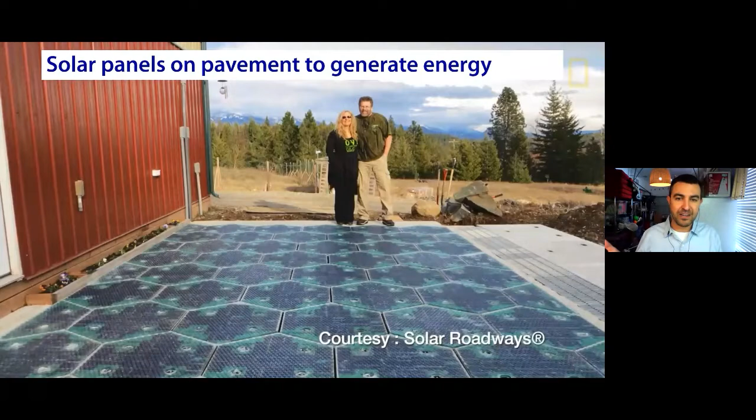Solar Roadways is a company in Idaho, a husband-wife company that's done lots of different ways of building solar panels you could drive on. Caltrans looked into it, but decided against it. Another major company called SolaRoad, out of the Netherlands - this is one of their test sections that they've built.

So the people who like the idea of solar panels on pavement say that we're generating free energy, and they estimate it takes about 220 square feet of solar panel to power one house - so that could generate a lot of free energy. The critics say the cost doesn't work out, the return on investment doesn't work.

And when you drive 18-wheelers on these panels, they don't last very long. There's also issues of texture and friction. So what's becoming more realistic is maybe solar panels in parking areas or shoulders, but probably not main lanes. So that's one idea.

The Ray, this test section in Georgia, is run by a big nonprofit, and they've got about 12 different projects that they're running right now. So it's not just solar panels on pavement.

The Ray is also testing out fancy road striping that can talk to driverless vehicles. They're looking into things that are more for climate, and then they have these fancy weigh and motion devices that actually check the tires as you drive across the device for the texture to make sure that your tread is thick enough, and it can also measure tire pressure. So there's just a lot of new technologies that the Ray as an organization is working on.

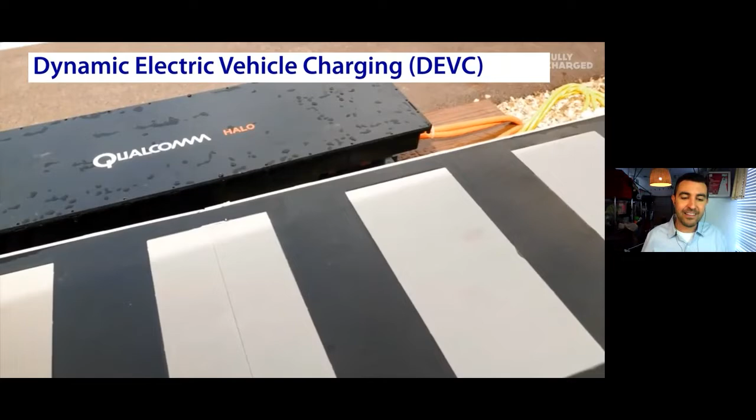All right, here's another big one. This is called dynamic electric vehicle charging, but this is recharging your Tesla as it drives down the highway. This equipment is built by Qualcomm. You're looking at a test section in France. It's embedded in the roadway, and then you drive over it, and through induction, it recharges the batteries in your car.

There are test sections in Israel and Sweden, and actually the Illinois Tollway Authority looked into doing this as a whole new way of collecting toll revenue, but they couldn't get the return on investment, the math, to work out. And so people who like this idea say, just imagine if you could just drive your Tesla over DEVC, then it goes forever.

Imagine these driverless electric cars that never even need to be recharged. But skeptics say that this is not such a smart idea because you're installing this in the pavement, so it's expensive to install, expensive to maintain. How are you going to maintain the pavement around it? And batteries on Teslas and other electric vehicles, the range is getting better and better, so it may not be all that necessary.

Now, the most realistic idea of this is maybe like a downtown circulator bus, kind of like a small shuttle bus that's downtown. As it circulates around, if it could recharge, that could possibly have a positive ROI.

Now, as far as electrification of roads goes, this is the organization that is leading the way in the United States and most of the world. It's at Utah State University, and it's called Aspire. They just got a $50 million grant from the Department of Energy to really start electrifying roads, and they are leading the nation at developing these ideas and looking into real applications for state DOTs.

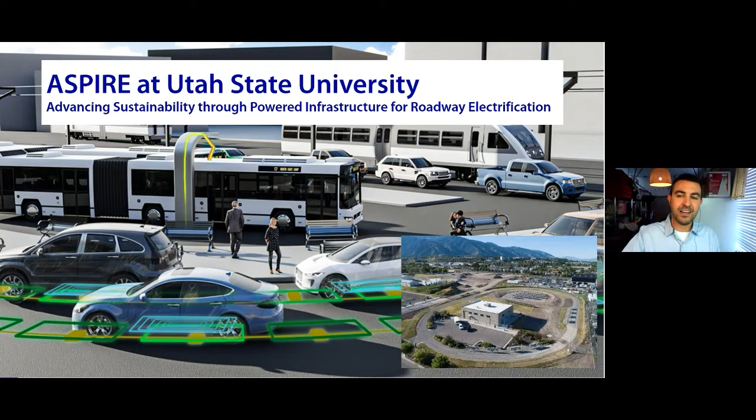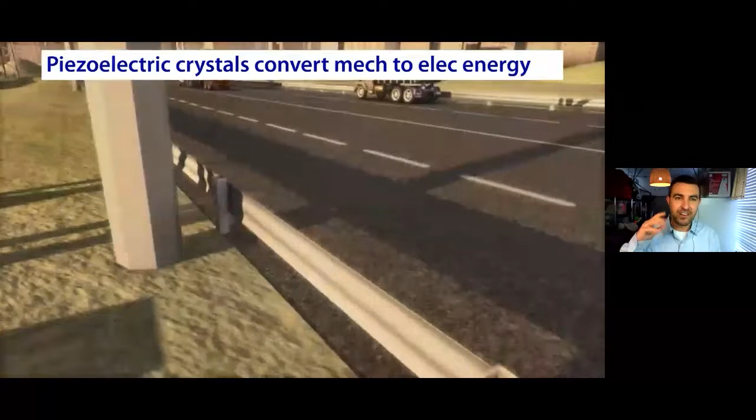Here's another way of doing free energy. This is a video from a company called Innowattech out of Israel. About 10 years ago, they built a test section where you put these little blocks, or piezoelectric crystals. When you squeeze them, it makes a voltage that turns into electricity. So if you drive over thousands of these, and the cars are squeezing them in the pavement, then you can create enough electricity to either store on the roadside, push it back into the grid, or use it to light the highway at night. These are real test sections that they've built, and they're actually working properly.

In the city of Merced, California, they built a test section to try this out. And in San Antonio, Texas, working with the Texas Department of Transportation and the University of Texas San Antonio, they're building test sections to evaluate this right now as well.

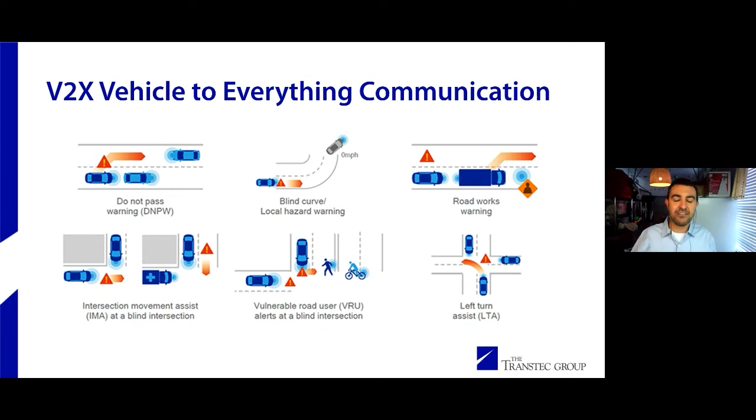This can provide new safety benefits that are already starting to be implemented and tested out. Imagine if cars are talking to each other - you could have do not pass warnings, alerts if there's a blind curve with a car stuck on the other side, alerts about work zones up ahead, help with intersection movements, alerts about a person or bicycle in a crosswalk up ahead, or left turns. There's a lot of information and safety features we could do with V2X.

V2X can improve traffic flow and safety and change the way we do lane markings and joint patterns. Roadside units are little boxes you stick into the side of the road that are a major component of V2X, referred to as DSRC, dedicated short range communication. It helps cars talk to each other and to the cloud.

New cars are already doing this - sending data to cell towers, and that goes to the manufacturers right now. But that data could soon, instead of going to manufacturers, start going to other databases. That data is called basic safety messaging, and it's generally about 138 kinds of information that go from the car to the cloud 10 times a second.

Right now, if you've got a 2018 or newer vehicle, the car manufacturer is capturing all this information from your car passively without your knowing it - everything from is your turn signal on, are you depressing your brake, what is the accelerometer saying about going uphill or downhill or sliding. It's just a lot of information.

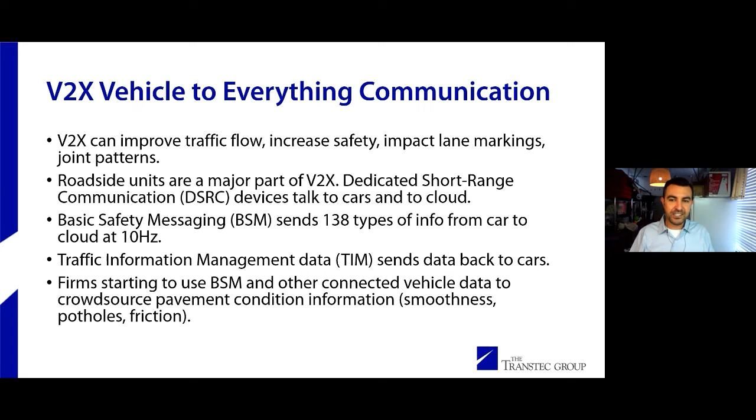We're able to send information back to the car through what's called traffic information management data. Companies are starting to use this BSM data with connected vehicles, and we're starting to develop crowdsourced pavement conditions, which can affect the way we measure smoothness, potholes, or friction.

V2X is a huge field. You could also imagine using it for driverless truck platooning. Adaptive cruise control is available on new cars, and cooperative adaptive cruise control is where the cars talk to each other - that's coming, and V2X is going to enable that.

Imagine if cars were talking to each other and to the cloud - you wouldn't need toll gantries anymore on toll roads. That's what people call a digital wallet, and that could ultimately change the way we pay for roads. If you think this is crazy, there are well over 40 million cars on the road today in the US already sending data to the cloud, and they estimate that within 10 years, the majority of cars on the road will have this capability.

All right, other things that are going on - in Finland, a company called Vaisala has already built a real-time pavement management system that doesn't use any of those fancy million-dollar vans that you hear companies using for automated distress data collection that state DOTs use.

This company, Vaisala, cut a deal with the postal service of the nation of Finland, basically the USPS of Finland, and they've strapped cameras and sensors onto every delivery truck. So instead of having these million-dollar vans, they've got a $50 pack of sensors and cameras on every truck that's collecting all this data in real time. Vaisala claims that all this constantly feeds into what they claim to be an artificial intelligent system that's doing real live pavement management in real time, which is pretty amazing.

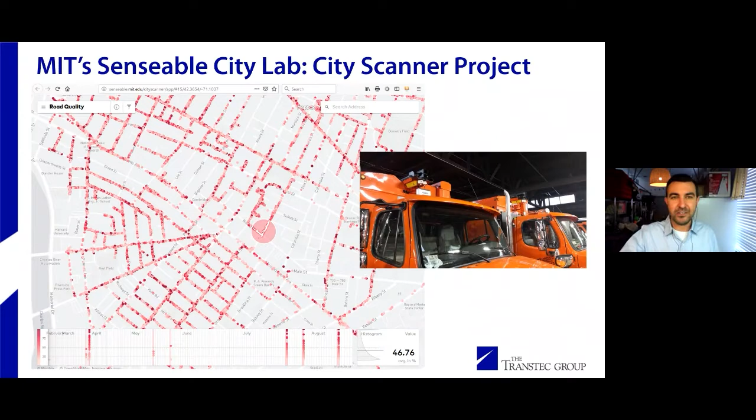Here's a company called iCone that is selling work zone products like cones and barriers and stop signs, and they're all connected to the cloud. The purpose of this is that by having work zones connected to the cloud, you can have devices that could actually send data to connected cars. So imagine your backup camera screen or your infotainment screen in the middle of your dashboard console could light up and alert you that there's a work zone coming. Also, the same devices could alert workers.

So you could put a cone, or that construction zone pin, far out at the leading edge of the work zone. And if a car crosses into that, it could sound an alarm or siren that alerts everybody in the work zone that a car has breached it. So it could really improve safety for work zones.

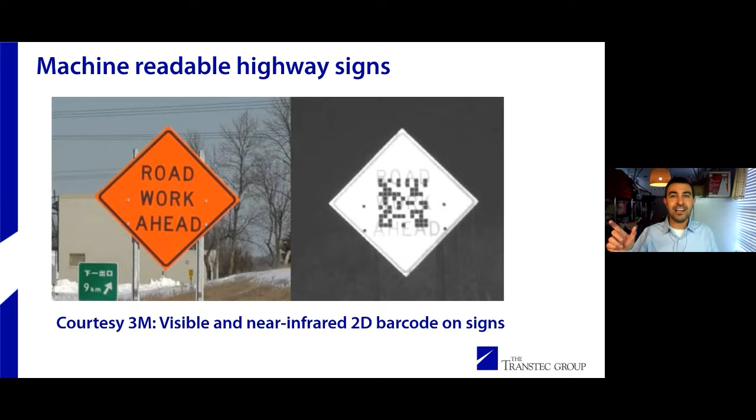It could do things like wrong way driving detection. It could tell the car about upcoming work zones or other information, lane changes, narrowing lanes, any of that kind of information.

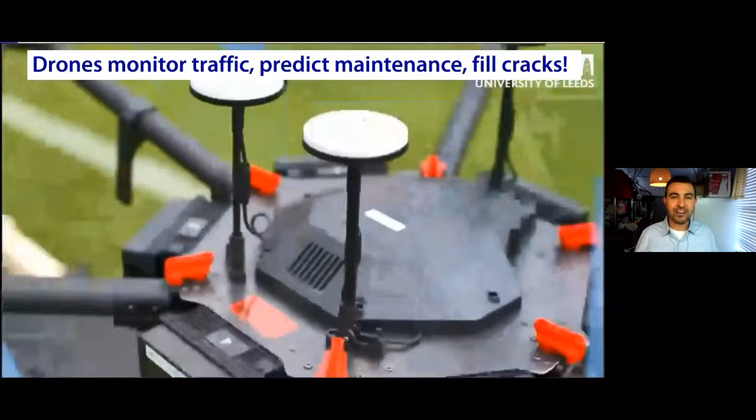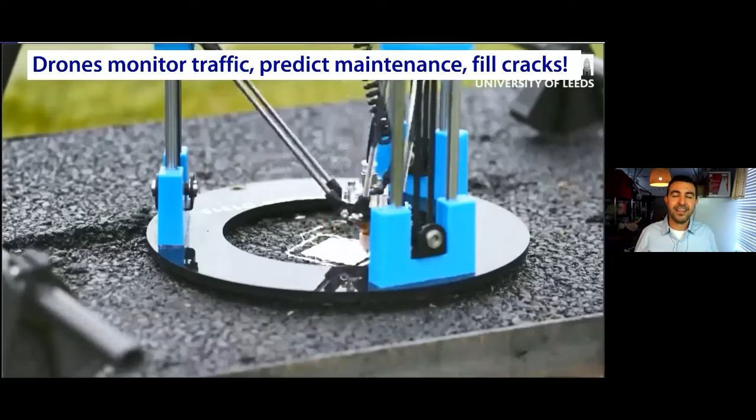All right, here's one that's a little more crazy. We've all seen drones, that's not new, and drones are starting to fly over traffic. That used to be prohibited, but now it can happen. So here's a drone that flies over traffic, looks for cracks, and seals them. Now, if that's bananas to you, it is bananas, because I don't think the researchers really considered the idea of 18-wheelers in traffic. I think 18-wheeler versus drone, the drone's not going to win. But this is a real thing. People are actually using drones for all sorts of things.

There are other companies actively using drones for pavement management, where they're flying over roadways. They have really high resolution LiDAR and high resolution cameras, and they're able to identify small cracks and use that to develop maintenance plans. They're also able to use it for pavement management systems.

Here's another one: glow-in-the-dark striping. An engineer named Daan Roosegaarde in the Netherlands conceived the idea of mixing photoluminous powder with thermoplast to create glow-in-the-dark stripes. So he developed that, and now they're starting to roll out this technology for other things.

There's a university in Mexico that developed this, and now Cemex is starting to sell glow-in-the-dark cement. Other people are developing glow-in-the-dark aggregates that you can embed into lane stripes to make glow-in-the-dark striping materials. That's becoming popular throughout Europe.

There's a lot of new research on de-icing pavement, coming up with ways to do it more effectively and less expensively. The University of New York in Binghamton has done a geothermal experiment, drawing water from a nearby lake through an underlayment beneath the pavement. They've found it very inexpensive and effective, running warm water through tubes in a geothermal application to de-ice pavement.

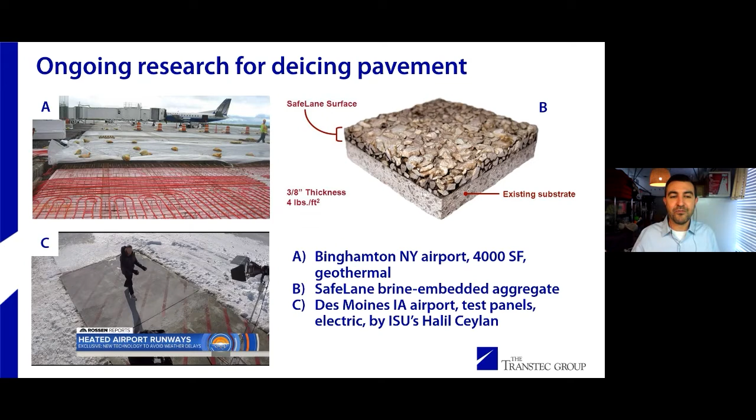Item B is a new product from a company called SafeLane, where they've embedded brine into a top coat of aggregate that they claim works for seven seasons, thawing ice using the brine. Our friends at Iowa State University's Concrete Pavement Technology Center have come up with a way of running electric lines to heat the pavement using electricity, with real success. They actually got profiled on the Today Show recently.

Of all the new technologies, this one is the kookiest, but it's real: glow-in-the-dark trees. Scientists and researchers at MIT identified luciferase, the enzyme that makes fireflies glow. They realized they can put it into leaves of trees and make the whole tree glow in the dark, lighting our roads at night for $0. They claim trees already glowing up to 4 hours per day, optimizing toward 8 hours per day, which is ridiculous.

If you think this isn't real, there are independent, unrelated research projects doing the exact same thing in Denmark and Israel right now, trying to make glow-in-the-dark trees. The one thing I haven't found is whether they understand the difference between evergreen and deciduous trees, because I don't understand how this works in the winter, but that's what they're doing.

So that's a quick snapshot of a whole bunch of technologies coming to roadways. The thing they all have in common is that you and I are not developing these things—it's Google, Tesla, Uber, Silicon Valley, and these high-tech companies. The same way they've infiltrated newspapers, retail, and other industries, they're now in our industry. What I don't see is that they really know transportation needs the way we do. They know technology; transportation needs are our expertise, and we need to be more involved.

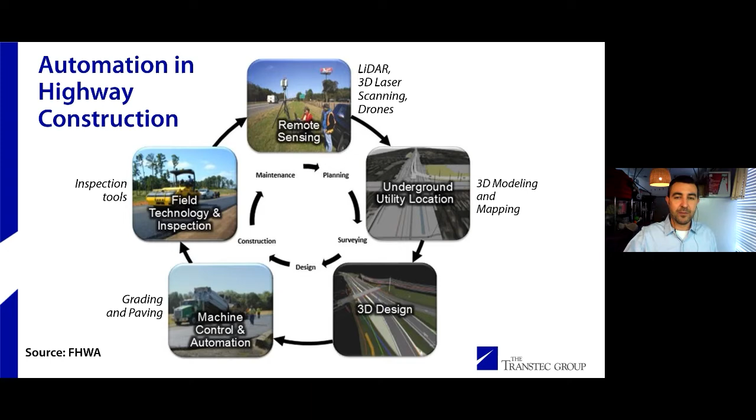We talked to some of the biggest companies in highway construction and asked them what are some of the newest advances they see happening for automated construction. These are some of the examples they gave, but I want to show you the newest one that I saw.

So sit back, relax. This is a company called Built Robotics. They are, not surprisingly, out of California, and they are fully autonomizing construction equipment. Take a look at this.

All right, cool, but terrifying.

They are currently selling their construction equipment mostly for contractors on wind farms. This is a testimonial from their website, and I'll read a little bit of it: the Built Autonomous Dozer is the real deal. They've already finished hundreds of pads for these wind turbine farms that this contractor is building. He refers to it as, our skilled operators do the complex stuff, and the Built Robotics equipment is fully autonomous, doing what he describes as the more mundane work.

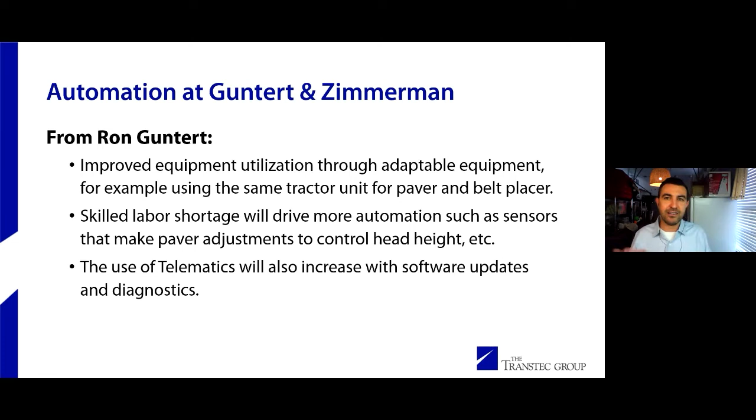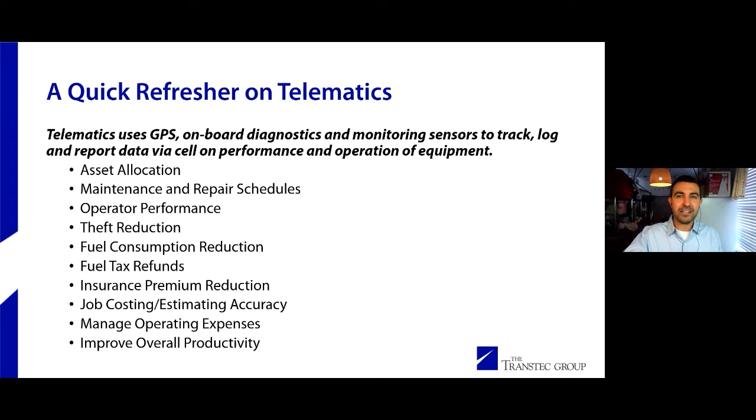A quick refresher: telematics is not new, that's been around for a while. That's using GPS and sensors to make improvements to the performance and operation of equipment, for benefits like asset tracking and reducing theft. So that's not new, but they believe there's still a lot of room for advancement by enhancing the software that runs the telematics they have.

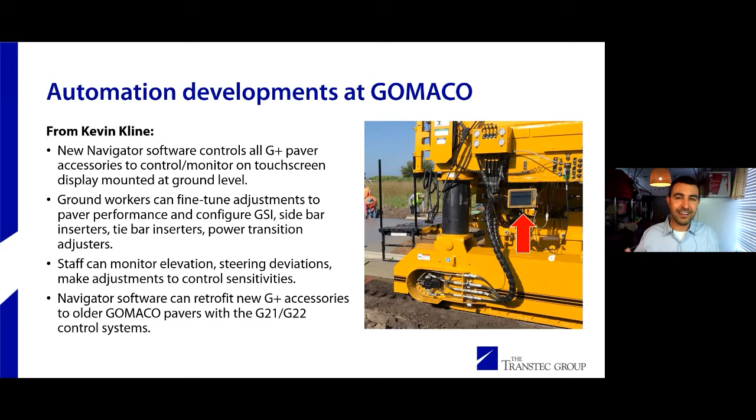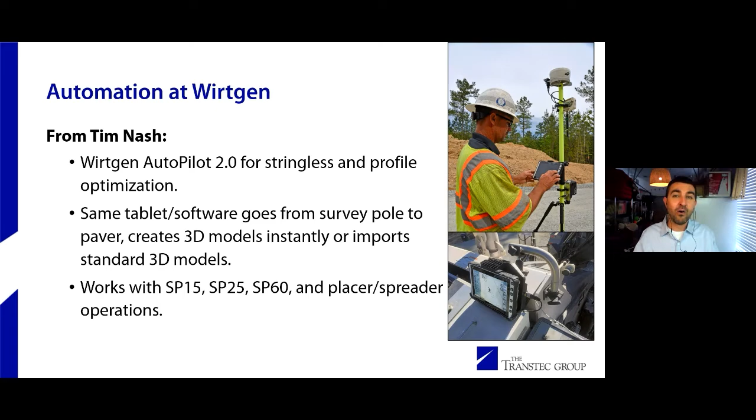We also talked to Wirtgen, and Tim Nash explained how Autopilot 2.0 is the newest thing they have for stringless paving and optimizing profiles, because it's one tablet you can take from the pole straight to the paver, and it'll make 3D models instantly, or you can import 3D models you already have, and it works with all existing equipment.

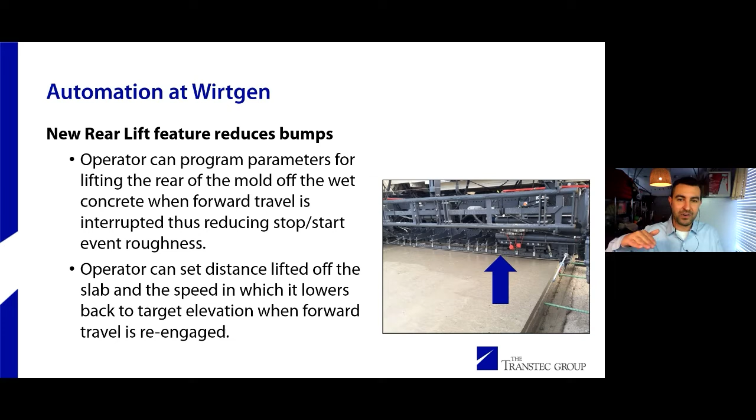The other thing Wirtgen had is a new rear lift for the start-stop of the paver to reduce that bump that happens. So the operator can now program that in so that as the paver comes to a stop, the rear mold can adjust a little bit and try to reduce the bump that often happens.

Then we talked to Trimble, and I'll show you two videos that they sent me. SiteVision is full-on augmented reality. Remember the difference between virtual reality and augmented reality: virtual reality is everything you see as an animation, while augmented reality is the actual video or image in front of you with graphics overlaid on top of the real image.

So I'll show you an example of that. SiteVision has come up with some pretty cool new advancements, and they sent me this video using a testimonial from Cold Spring Construction.

They're out of New York, and they're an ACPA member.

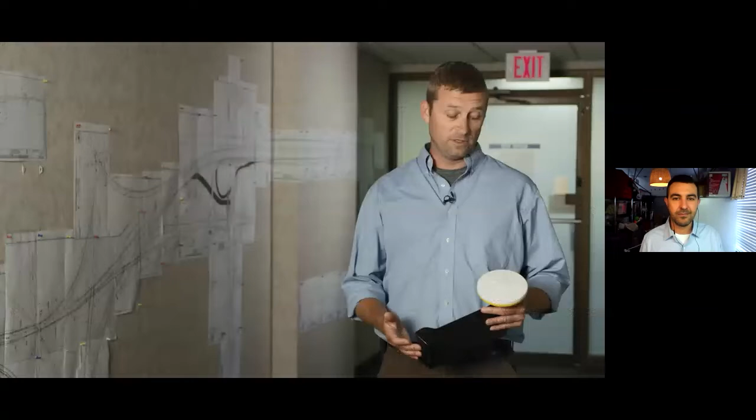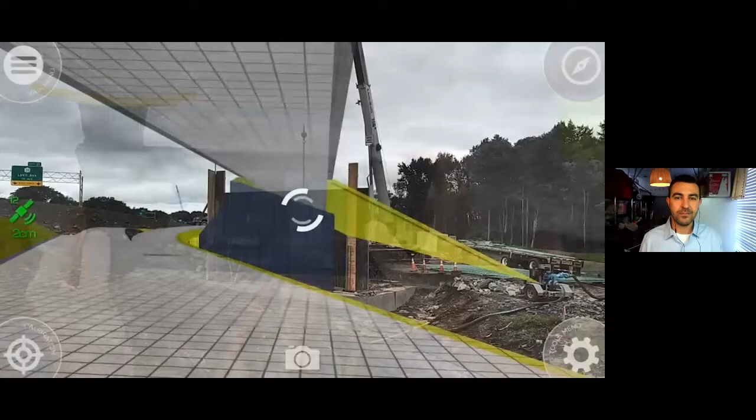So here's the video. This is the first opportunity we've had to use the Trimble Catalyst with the Google software, and what it enables us to do is go out and look at the design to be constructed, overlaid on the actual site conditions in real time.

The ability to actually visualize what's going to be constructed before it happens is an enormous advantage. Pretty cool. That's augmented reality, where the graphical image is overlaid looking right through the camera of what's actually out there. Here's a second video from Trimble. It's pretty cool.

Pretty interesting stuff, so that's pretty wild. All right, things that are coming in paving equipment.

Real-time profilers, not new, but we're finding more and more state DOTs starting to embrace and accept real-time profiler equipment, and that technology keeps advancing as well.

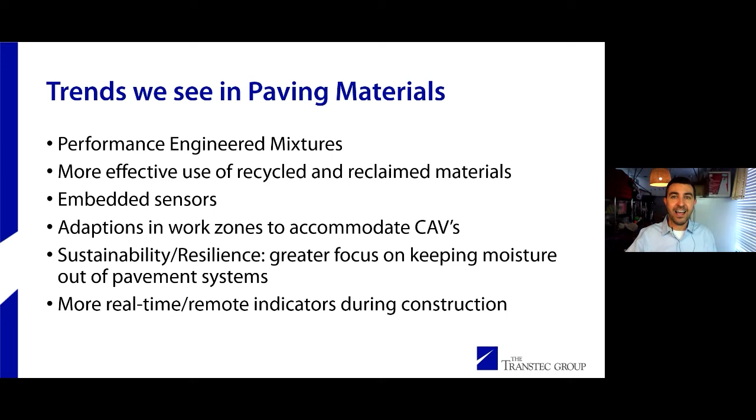These are all the hot topics that we keep seeing state DOTs are interested in pursuing and advancing, which is great. So in conclusion, we see a lot of new tech that is going to change the way we pavement engineers and contractors are working in the field.

What we see from all that is our DOTs not partnering enough with contractors and even with the engineering firms to work together through these changes, to ensure that as they adopt these new things, it is in concert with contractor needs and contractor abilities. So I think there's area for improvement in that.

All right, last section of our presentation. So we talked about crazy new technology that's coming to roadways. We looked at new technology that is coming to equipment and paving. But let's look at the specifics of how paving design and pavement construction could really change in the future.

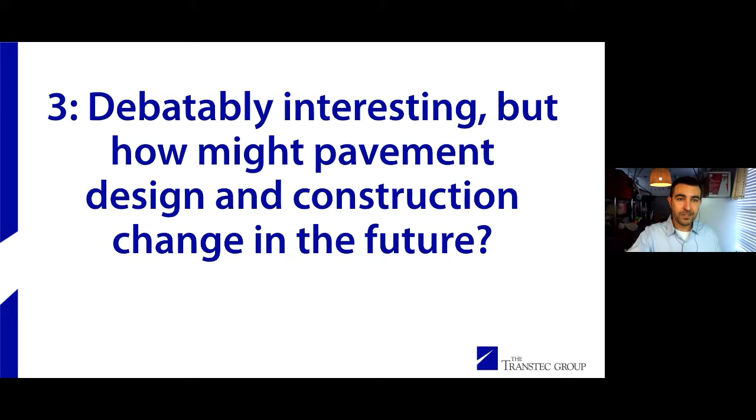They've got toll roads in Virginia and Indiana and Texas, and they see all this new technology coming, right? So Cintra is a giant multi-billion-dollar legacy corporation that sees all this new technology coming, and they see that it's being driven by the Googles and the Ubers and the Teslas, and they're trying to get involved.

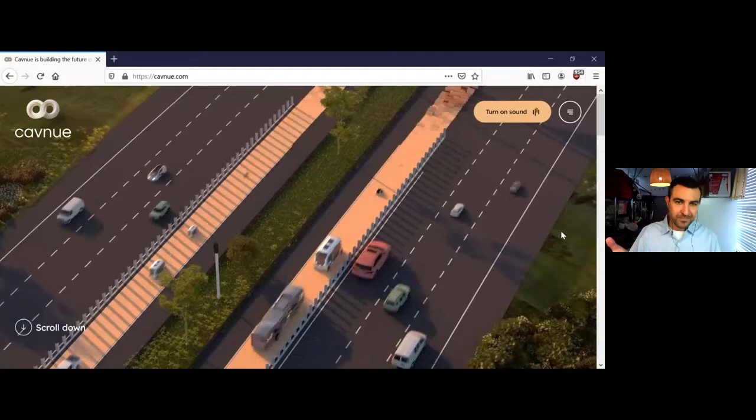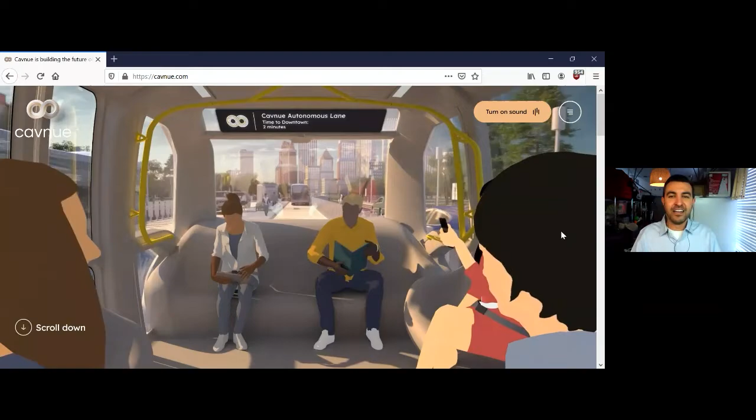So this video, we'll show it one more time and I'll walk you through what they're doing. They're saying: take your traditional highway with too much congestion and replace the middle lane with a fully autonomous lane in each direction that talks to cell towers. You'd have driverless 18-wheelers and driverless cars, and even if your car isn't driverless, you'll merge into the driverless lane, take your hands off the wheel, and it will become driverless - they'll develop that technology. Then in the downtown urban area, we'll have driverless shuttles working on these lanes. So Google's plan is to provide all this technology, get into the highway business, and build this high-tech roadway - that's the direction they're trying to go.

Let me switch back to the presentation... and there we go. So that is what Google is trying to do.

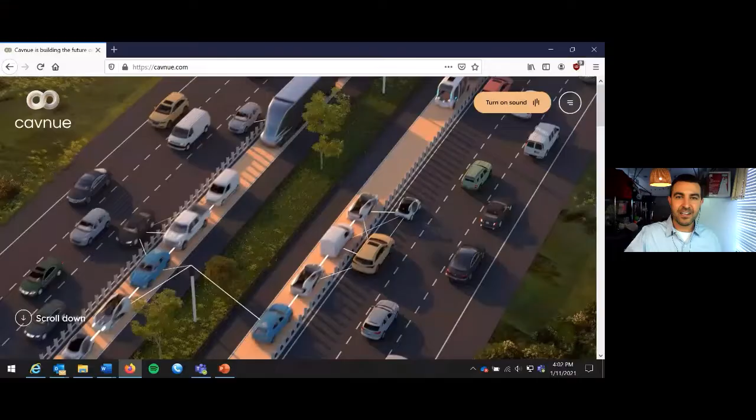What's crazy about all this is they think the way they'll generate revenue is not just from collecting tolls. They want to get into this business because they see billions of dollars in being able to generate revenue off all this data. These lanes could recharge your electric vehicle as you drive across it, and they could charge you money for that. Or these lanes could send advertisements to the infotainment screen in the middle of your console, generating revenue that way. Or they'll put ads in those driverless shuttle vehicles. So Google is very much interested in getting into the highway business.

And one last important thing - they're already doing it. Google just a month ago signed a contract with the Michigan DOT to study, over the next 2 years, a stretch of Interstate 94 in Michigan. If they think the concept I just showed you in the video is a viable alternative for Interstate 94, they're going to build it. They didn't have to, but they cut this deal with Michigan DOT by offering to do their own study for $0. So Google is paying their own money to do it. At the end of 2 years, if Google determines this could be a positive return on investment, they have full rights to build this on Interstate 94 in Michigan.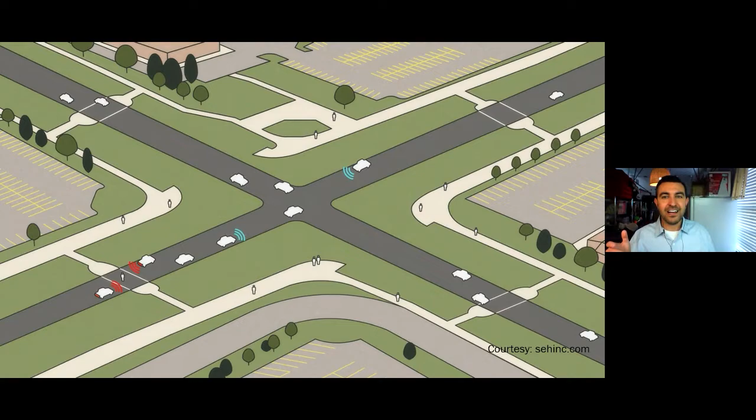Here's another graphical example of how roads could change in the future. If cars are talking to each other, talking to the cloud, and becoming more driverless, then we may not need as much pavement. I don't like the sound of that, but it's a real possibility. We may not need as many lanes, lane striping, medians, traffic lights, or traditional crosswalks. Some people think we may not even need parking lots in the future, because driverless cars, Ubers, and Lyfts mean people aren't going to keep owning vehicles.

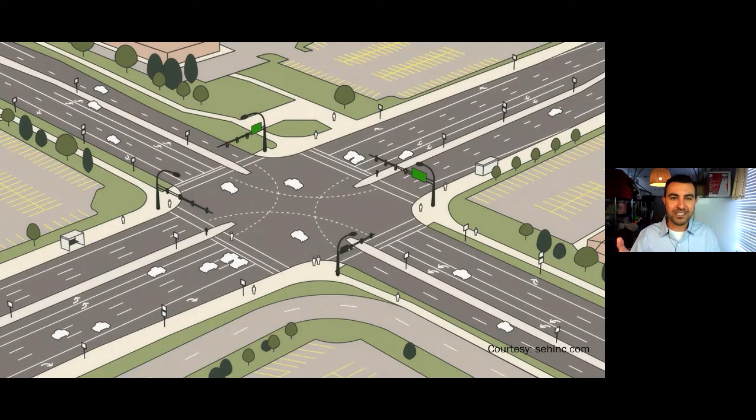So this is kind of a quick representation of what the future could look like, and that's a real consideration. Let's start talking about the specifics of how pavement design and construction could change in the future.

As you think about all these things we've covered, DOT planning is going to change because traffic patterns and human needs are changing as cars become more connected and driverless. Also, these big design-build projects that happen around the country could become more popular because as technology advances, DOTs don't have 40 years of historical legacy knowledge of how all this works. They're going to rely more on private sector companies to answer a lot of these questions about how you develop that.

You see that's what's already happening with Google offering to build a toll road on Interstate 40. Also, as more of these Uber, Lyft, shared vehicles happen, you're going to have fewer cars owned by people, so there'll be less need for parking lots. We may actually have to start creating, imagine a right lane that is just for dropping people off and picking people up for all these Uber and Lyft type vehicles becoming more popular.

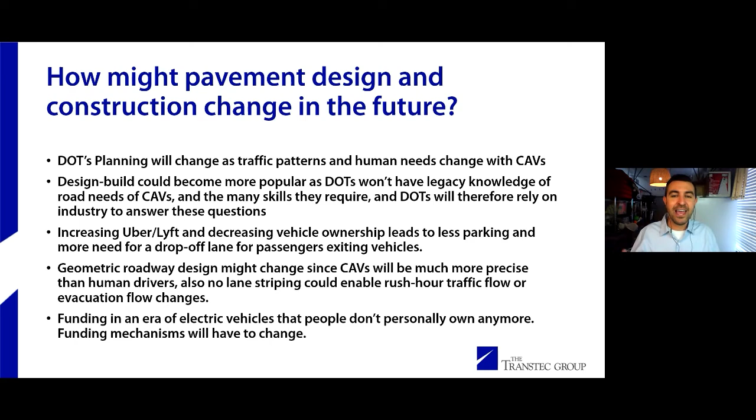Geometric roadway design is going to change as well because CAVs will be a lot more precise than human drivers, and we may not even need lane striping as much. We'll look at that in a minute. Electric cars are becoming more popular, which means we're buying less gas, which means we're generating less gas tax. So how we fund roads of the future is going to have to change.

So some specifics that could change pavement design. Driverless 18-wheelers are being tested right now, and driverless cars on highways is a possibility being tested right now. If you imagine if they're driverless, then there's no lane wander anymore, right? That 18-wheeler is computerized, so it's going to be right in the wheel path all the time. Less lane wander could actually be good for concrete versus asphalt because you've got more localized impact loading happening as you're driving over the same wheel path every time.

Narrow lanes also leads to greater impact and greater fatigue on that narrowed pavement, and that could also be a good argument for concrete over asphalt.

As you do these driverless truck platoonings, that will lead to reduced following distance between trucks, which means you have less recovery time from the load, between trucks or in the headway. So reduced following distance could also be good for concrete over asphalt.

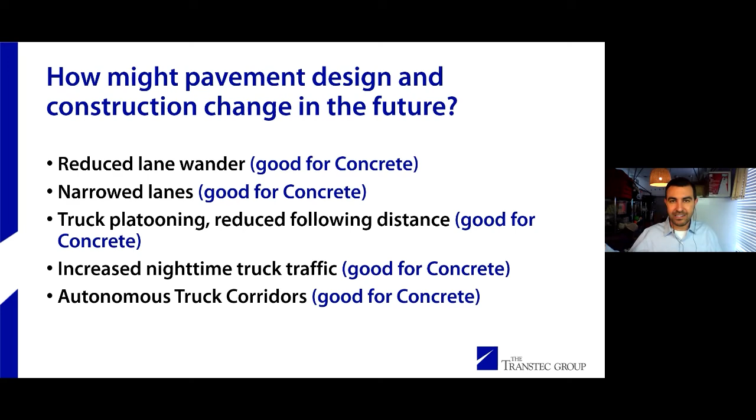Also, as we move towards driverless trucks, the hours of service is going to lengthen, so we'll have more trucks moving more hours per day. There'll be increased nighttime traffic, which is a totally different design for asphalt. That could be good for concrete pavement.

And then autonomous truck corridors—this is a concept developed by our friend Tyler Ley, who's a professor in Oklahoma, of like, let's have dedicated lanes for driverless electric trucks, whether they're powered overhead or they're just electric trucks powered underground. We could develop these autonomous truck corridors, and if you think about that, that is absolutely a great argument for concrete over asphalt.

Other things: embedded sensors, embedded electrification of roads. Some people want to put, like in Colorado, they want to put Wi-Fi in roads, they want to put fiber optics in roads. All of that is a good argument for concrete over asphalt.

Also, the increased demand for resilient pavements—as we've well seen, concrete does a much better job of surviving major weather events over asphalt.

Something that is changing, but is not necessarily a strength for concrete: if we start to remove signalized intersections, then we may not have the rutting and shoving of asphalt at intersections where we have turning movements and stopping and starting. But that's just a change that could be coming to the way we design and build pavements.

And then future work zones, as vehicles are talking to each other, and just the increased need for pavement smoothness, because all of these new technologies can only function on pavements that stay smooth over a long period of time. So that's a good argument for concrete.

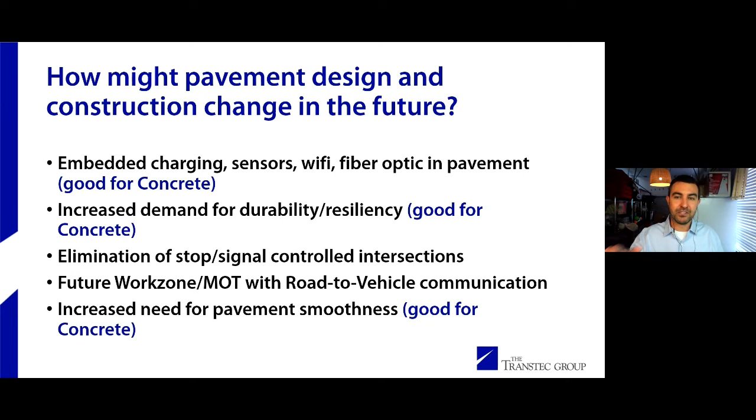Finally, Vision 2040 is a report written by the American Concrete Pavement Association that touches on a lot of these topics. It's a great report, freely available on the ACPA website. I highly recommend it. It's good reading material.

So in conclusion, number one, it's not you and me, it's tech companies that are driving the future of this transportation. They don't know long-term transportation needs, we do. So we need to be more involved in that.

Number two, tech is also changing these contractor abilities from workforce issues. So how are we partnering with DOTs to make sure that we're steering this in the right direction?

And then three, I think concrete pavements could have a lot of good advantages as we look at how pavements are going to be designed and built in the future.

So one last summary comment. I think we really need to do our best to work more with these high-tech companies to improve the way highways are built so that we could do that together. And that's a quick summary of what's going on. Thank you very much.